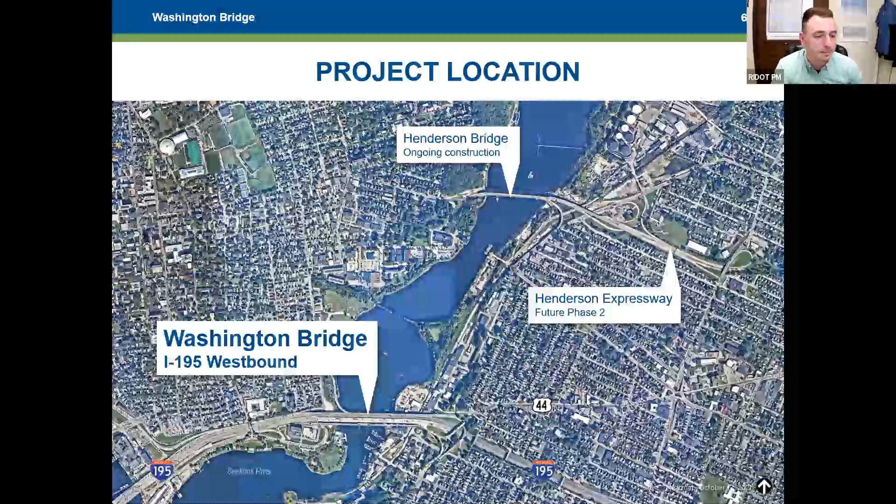The I-195 Washington Bridge North Phase 2 project is located in and around the westbound half of the Interstate 195 corridor in Providence and East Providence. The eastern limit of the project is near the Broadway underpass in East Providence, and the project work extends approximately 1.5 miles to just beyond the South Main Street exit on the east side of Providence.

Along this stretch, there are 3 primary locations where our project work will be focused. First, from east to west, the restriping of 195 West through East Providence to include 4 travel lanes and the construction of a new exit to Waterfront Drive. Second, the rehabilitation of the existing Washington Bridge North superstructure, which carries I-195 westbound traffic over the Seekonk River, as well as Valley Street, Waterfront Drive, Water Street, the East Bay Bike Path, and Gano Street.

The third main location of work for this project involves constructing a new on-ramp from Gano Street to I-195 West, which involves the realignment of the portion of Gano Street located under the bridge. Jeff will be getting into much more detail on each of these locations in just a few minutes.

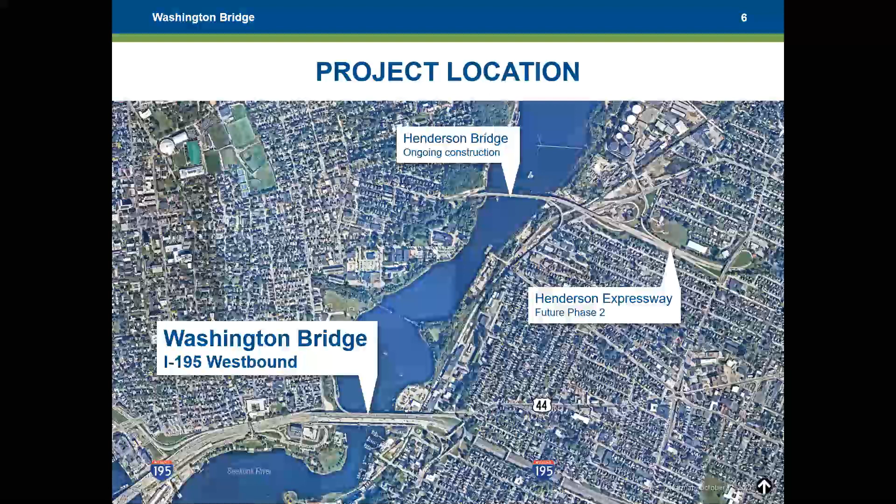Also worth noting is the proximity of the project to the ongoing Henderson Bridge project, located approximately 1 mile to the north. We thought many of you would also have an interest in that project, so I'll be providing an update on the current construction progress and future design plans a little later in this presentation.

The third structure is known as the Washington Bridge North and is the only structure of these three being worked on as part of this project. It was constructed as part of interstate expansions in the 1960s and currently carries around 100,000 vehicles per day. The structure was previously rehabilitated in the 1990s, as well as a partial rehabilitation focusing on the supports beneath the bridge that was completed in 2019.

The planned rehabilitation work under this contract, primarily consisting of concrete deck repairs and deck joint replacements, is being designed to extend the useful service life of this bridge by at least 25 years.

In 2020, RIDOT was successful in obtaining a competitive federal grant with a value of $25 million. These additional funds allowed us to design this project in a way that will not only fix the structural deficiencies of the bridge, but also address the chronic traffic congestion and associated safety issues in a way that otherwise would not have been possible. Through a competitive design build procurement process, the contract was awarded this past September.

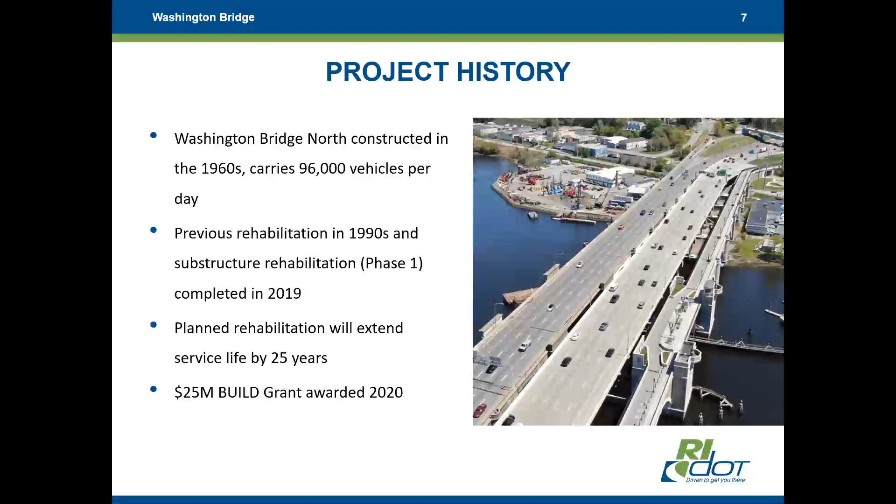We are currently progressing our final design efforts for this project, while initial construction activities, including concrete deck repairs and median barrier replacements, have already begun this winter.

During the life of this project, our project goals can be broken down into short-term goals realized during construction and long-term goals, which begin with the completion of the project and extend for its useful service life over the next several decades. During construction, our primary goals are to maintain existing travel access for all types of users throughout the corridor as much as possible, reducing or eliminating potential public safety risks from construction operations, and minimizing necessary detours and other temporary impacts to highway ramps and local city streets to the maximum extent possible.

Upon completion of the project, or sooner when possible, our major goals include reducing traffic incidents by reducing chronic congestion through the corridor, eliminating significant weaving movements at the GANO Street off-ramp, improving air quality by reducing vehicle emissions via these same congestion improvements, improving the condition of the infrastructure to a state of good repair for years to come, and providing direct interstate access for potential new development along Waterfront Drive in East Providence.

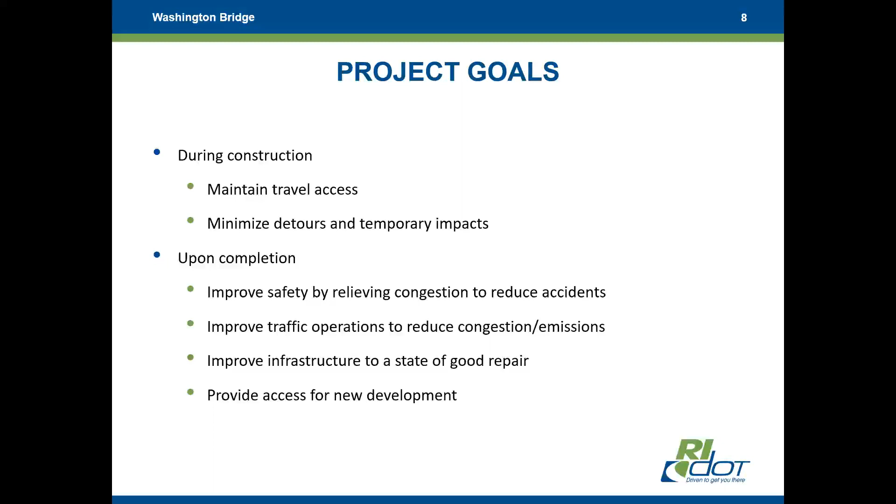And now I'm going to turn it over to Jeff Klein, the design manager for VHB, who's going to get into some of the more specific improvements we'll be making as part of this project. Jeff.

Thanks, Anthony. As Anthony mentioned, there's much more to this project than just bridge rehabilitation. So we're going to step through the project east to west, right to left on your screen, by first walking through the I-195 mainline traffic improvements. Then we're going to discuss some highlights of how those traffic improvements are achieved.

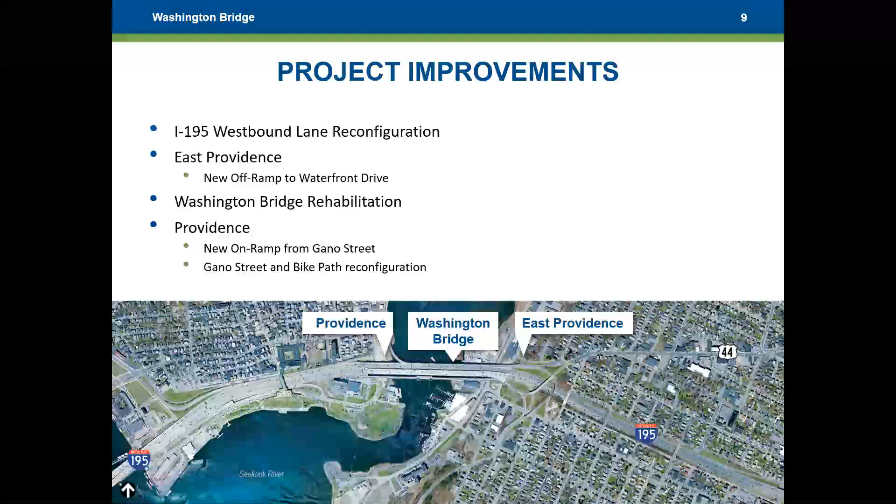To get started, I'm going to turn the presentation for a moment over to Pete Pavo, our traffic lead, to discuss the mainline traffic improvements. Pete.

Thank you, Jeff. Good evening, everyone. My name is Peter Pavo from VHB, and I am going to provide a brief overview of the traffic and safety benefits we expect from this project.

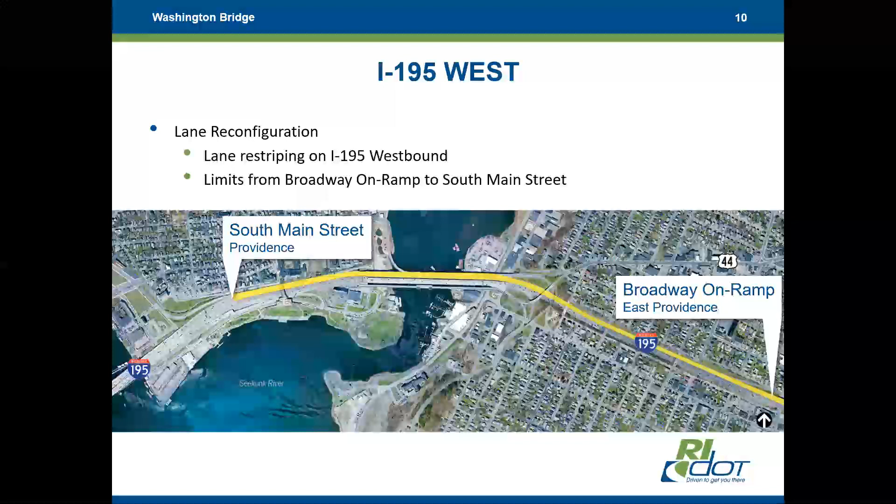It is no surprise that 195 West is congested during both the morning and, to a lesser extent, the afternoon commuter periods. This corridor is one of the most congested in the state. Based on pre-COVID traffic volume data, the travel time coming in from the Massachusetts state line ranges from 25 to 30 minutes.

There are three major bottlenecks along this corridor that contribute to this congestion. First is a low-speed lane drop just past the Broadway exit, which forces vehicles to merge immediately. The next is the weaving that occurs between the Taunton Avenue and Veterans Memorial Parkway on-ramps and the Gano Street off-ramp. And the third area is at the Gano Street off-ramp, where again the lane drop forces vehicles to merge.

Note that in the past year, we have seen travel times fluctuate from less than 10 minutes to over 30 minutes. This can be attributed to the changing travel patterns created from the pandemic.

Because this project was planned prior to the pandemic, the travel time numbers we are using may not match today's conditions, but are expected to return over the next year.

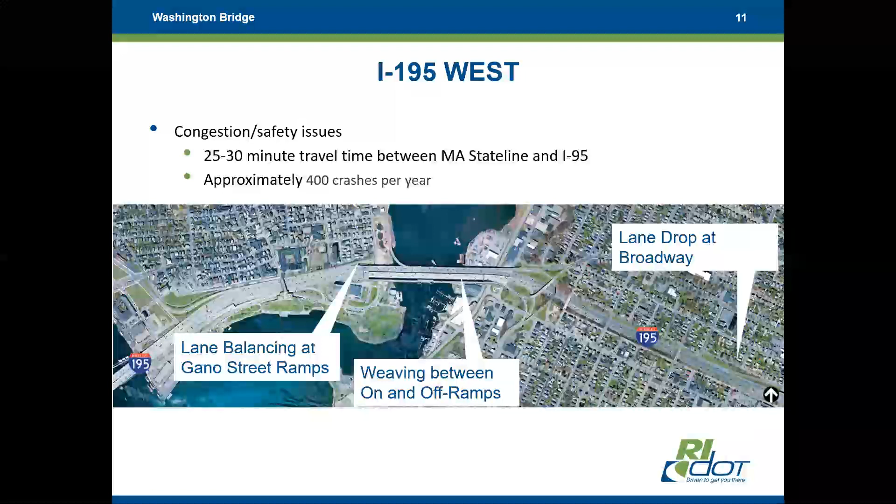To help understand the safety concerns, we reviewed crash reports and trends from the past 5 years within the project area. We found that along the corridor in the area of the project, there are typically 400 crashes annually. Most of these crashes are rear ends due to congestion or side swipes from abrupt lane changes.

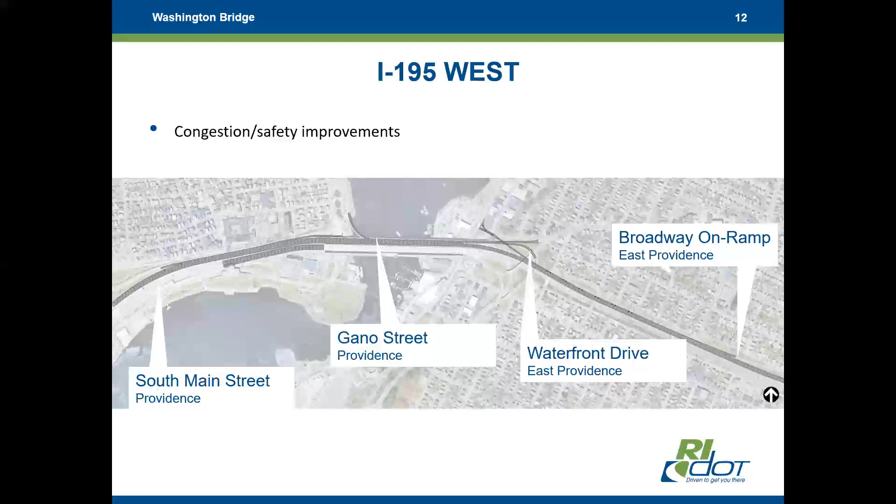To address these three bottlenecks to improve travel times and safety, the project will modify the lane use along the corridor. I will briefly step through each of the four areas of the improvements.

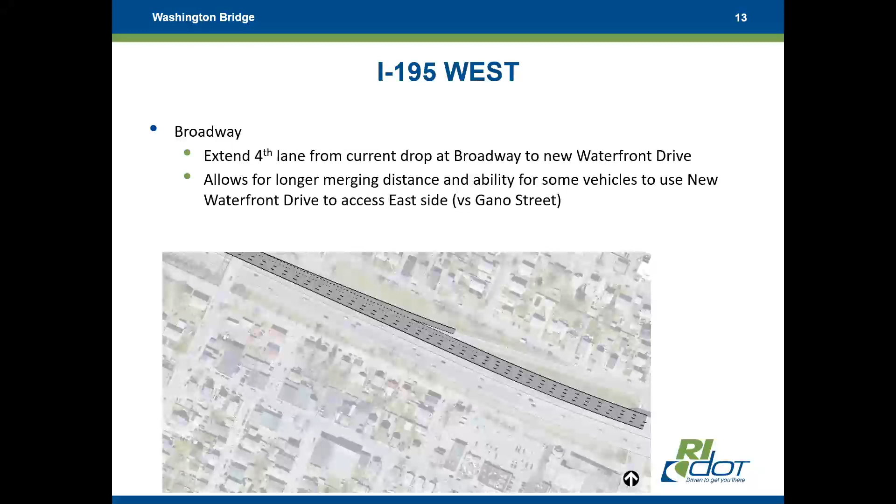Starting at the first existing bottleneck, the project will extend the fourth lane from the current drop point at Broadway to a new Waterfront Drive exit being constructed as part of this project. This allows for longer merging distance and also the ability for some vehicles with a destination to the east side to use the new Waterfront Drive ramp and cross the river using the Henderson Bridge.

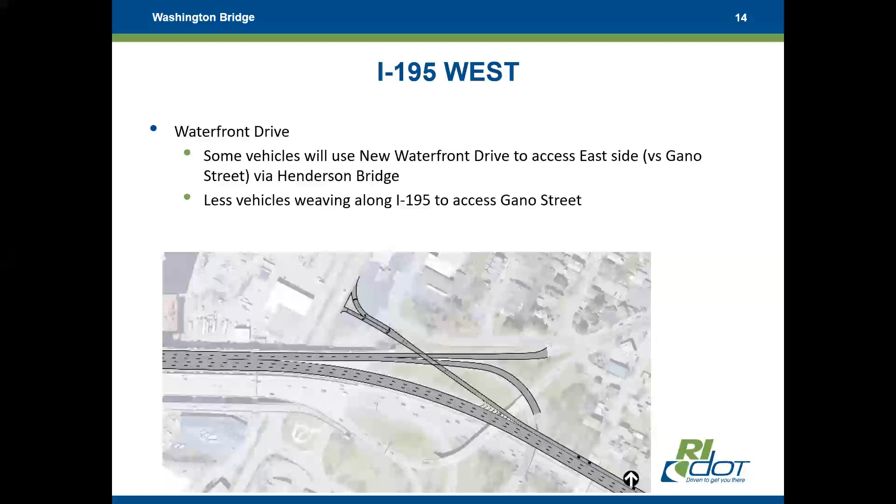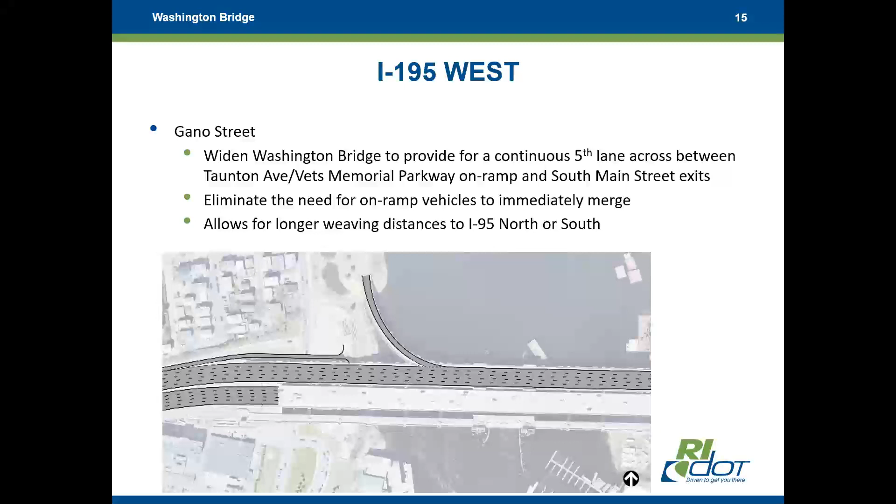While we don't expect a major shift in traffic, any small amount of vehicles diverted this way will help the weaving conditions along 195. To eliminate the need for the Taunton Avenue and Veterans Memorial Parkway on-ramps to change lanes as soon as they enter the Washington Bridge, so as not to get trapped at the Gano Street exit, the project will slightly widen and restripe the Washington Bridge just around the Gano Street exits to provide for a fifth continuous lane.

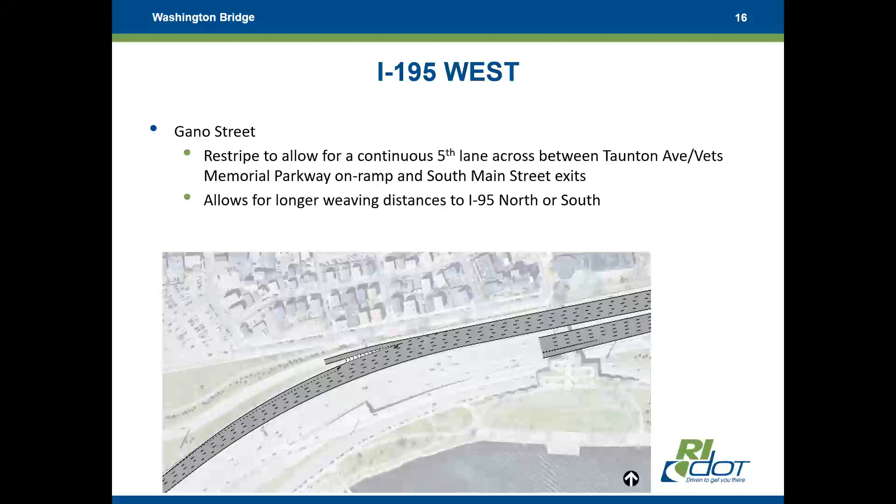Another minor striping improvement that will help traffic flow through the area is at the off-ramp to South Main Street, where we will restripe the lanes to an option lane, which will allow vehicles to continue through towards the I-95 split.

With the improvements I just discussed at the current bottleneck locations, it is expected that the travel time between the Massachusetts state line and I-95 will be reduced over 40% compared to pre-COVID conditions. This equates to the average travel speed during the peak hour increasing from 34 to 52 miles an hour. We also expect approximately a 35% reduction in crashes caused by this congestion.

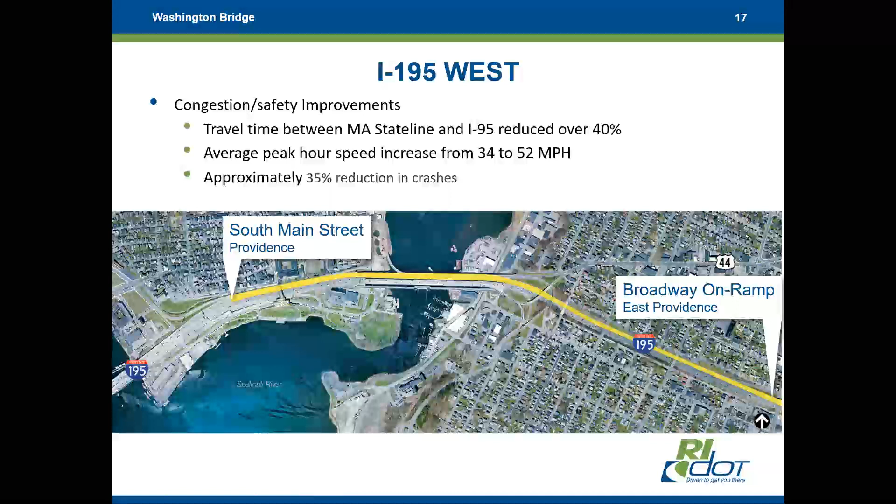Thanks, Pete. Beginning on the East Providence side, as we mentioned earlier, there will be a new exit constructed from I-195 westbound to Waterfront Drive. That new exit is going to travel below the existing on-ramps from Taunton Ave and Veterans Memorial Parkway. That existing on-ramp is going to be carried by a new bridge, and the new ramp will travel below the bridge.

The new bridge shown on the right in blue will require construction of a temporary on-ramp to keep this on-ramp open while bridge construction is ongoing. This phase of construction is going to begin this spring and ultimately is going to allow for the new off-ramp to Waterfront Drive to pass beneath the East Providence on-ramps, as the visualization shows on the bottom left.

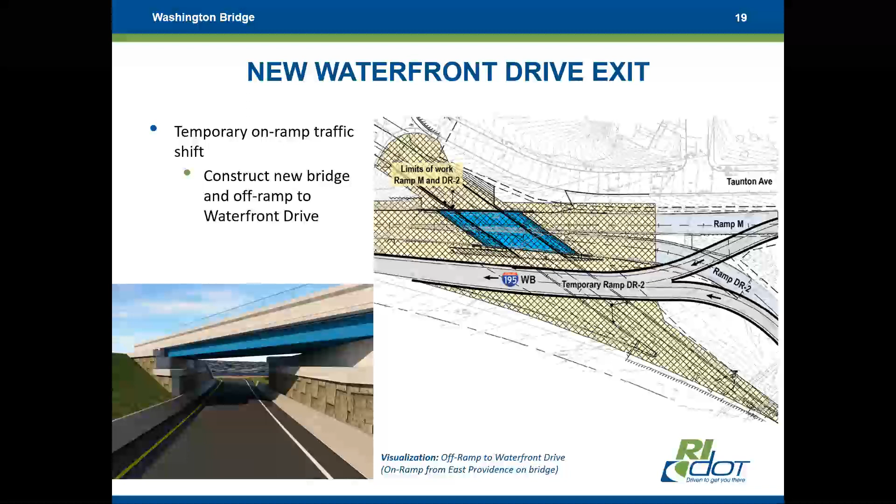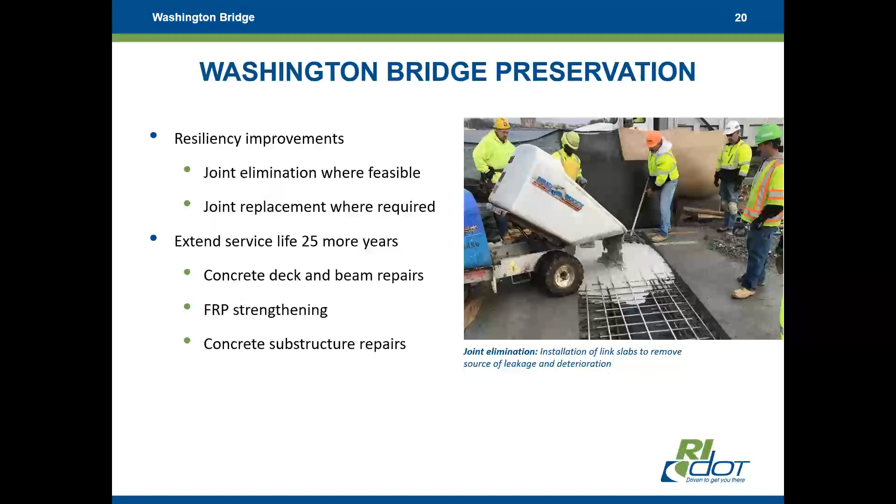One of the major issues driving the need to rehabilitate the Washington Bridge is leakage through the existing bridge joints. To help reduce this risk of deterioration, roughly half of the bridge joints will be eliminated in a method similar to what's shown in this sample photo. Stopping the cause of deterioration at the source, along with repairing and strengthening the deteriorating concrete, will extend the life of the bridge another 25 years.

As Pete mentioned earlier, the first few spans of Washington Bridge will be partially widened a few feet to provide the lane configuration improvements on I-195 westbound. No in-water work is required where we need to widen.

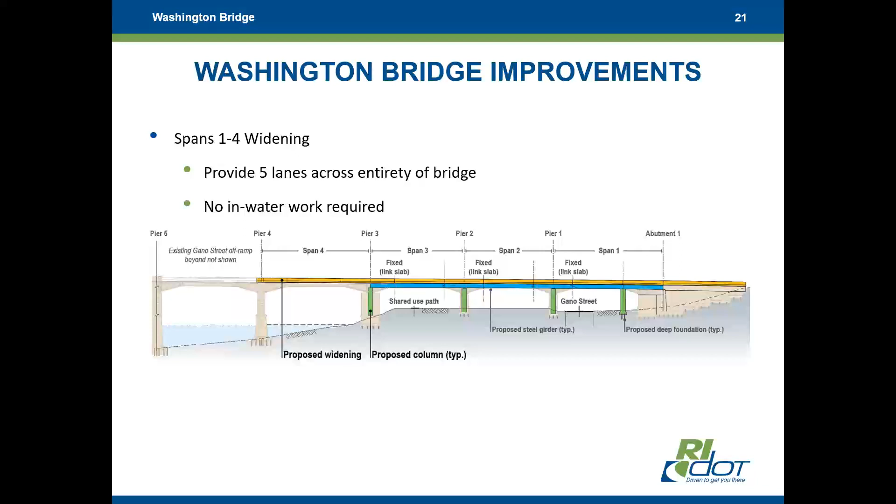GANO Street is shifted to align with India Street beneath I-195 under the third span of the bridge, eliminating today's sharp hairpin turn where GANO Street passes beneath the first span of the bridge.

The new bikeway along the relocated section of GANO Street along the river provides a key missing link in the regional bike path network by connecting India Point Park, the East Bay Bike Path, the George Redman Linear Park Bridge, and the Blackstone River Bikeway.

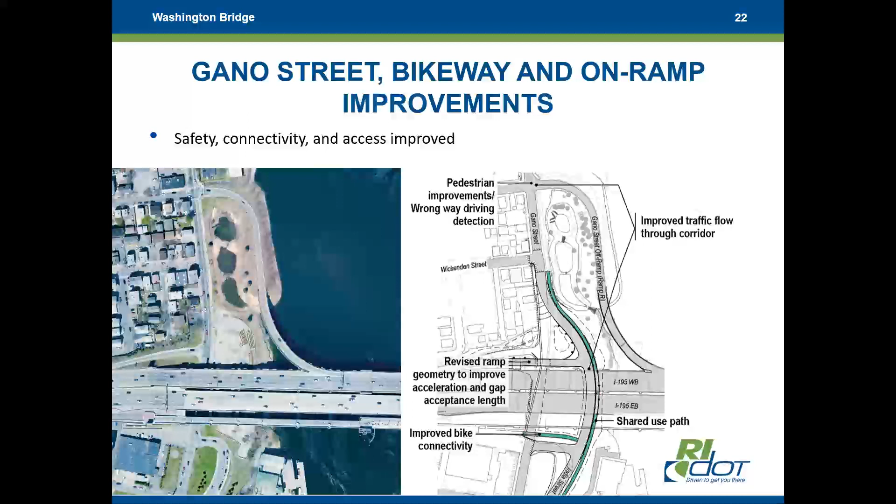The vehicles turning onto the relocated GANO Street on-ramp to I-195 westbound do not need to cross over where path users will be accessing the path. This avoids conflicts at this location. Pedestrian and bike crossing improvements are also going to be provided at the existing intersection of GANO Street and the I-195 westbound off-ramp.

Here's an approximate timeline of how we're advancing from our initial project kickoff in September of last year to substantial completion in fall of 2025. As you're probably aware, stage 1 is already in construction. In the next few slides, we'll walk through what's happening in each phase of construction in the coming years.

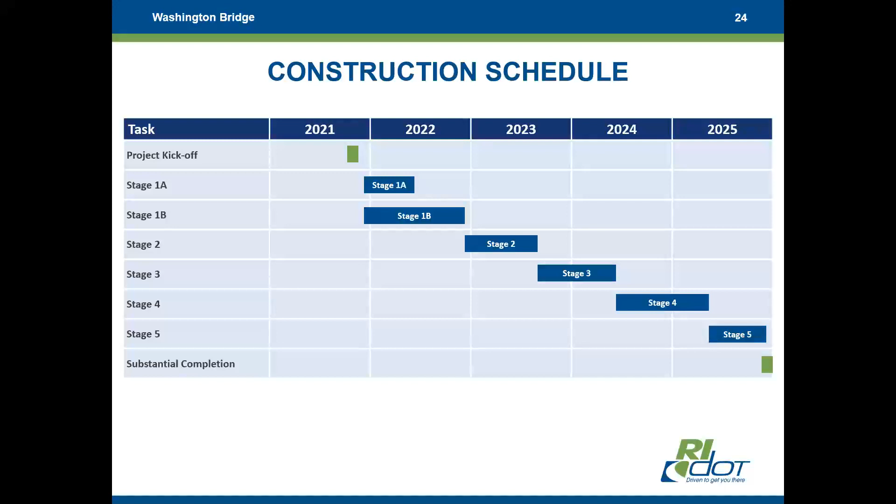Stage 1A included some prep work at the GANO Street exit ramp to open up a work zone to replace the left barrier on the bridge. This phase will be completed this spring, and the GANO Street exit will remain open other than periodic nighttime closures during this phase.

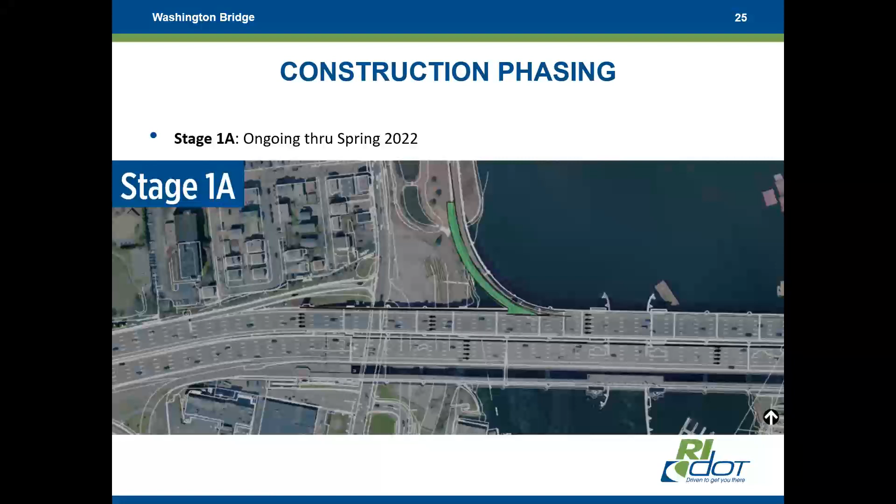We're also currently working in stage 1B. Just before the holidays, traffic was shifted to the north side of the bridge to open a work zone near the left median barrier. Within that work zone, the median approach barrier will be replaced. The bridge deck rehabilitation, superstructure repairs, and joint work will be ongoing. Later this year, the on-ramps from East Providence will be shifted onto the temporary ramp shown earlier to facilitate construction of the new off-ramp bridge.

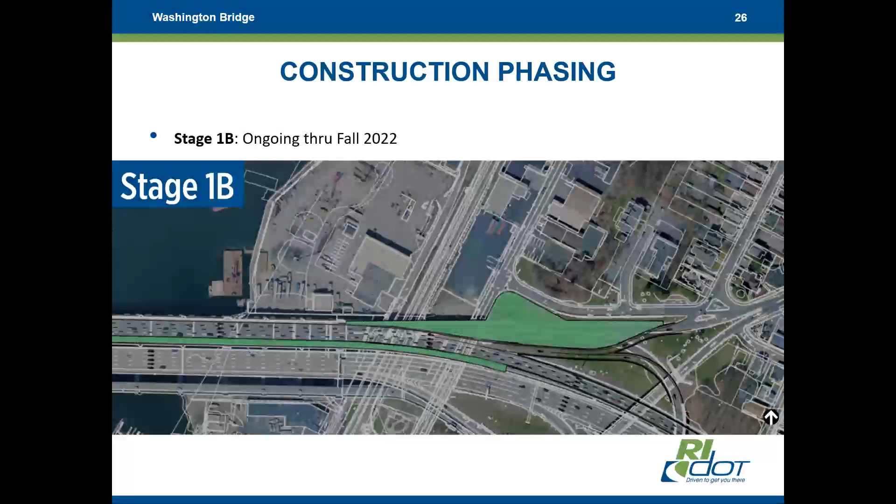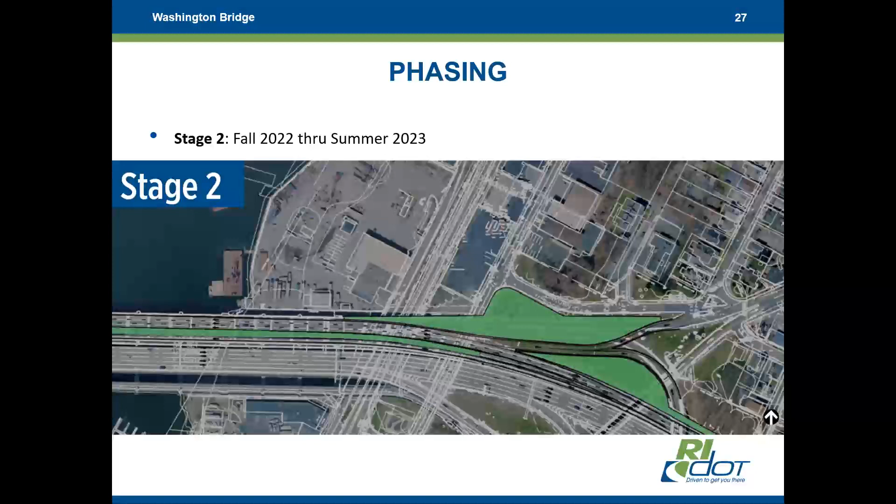In stage 2, traffic is split on I-195. All lanes continue through, but the left lane will be expressed to Route 95 only. The bridge rehabilitation work described in the previous phase is repeated lane by lane across each stage of construction, as you see here and in the next slides. Traffic entering the highway is on the temporary on-ramp alignment from East Providence. It's important to note that the same number of lanes that cross the bridge today are maintained in all phases of construction.

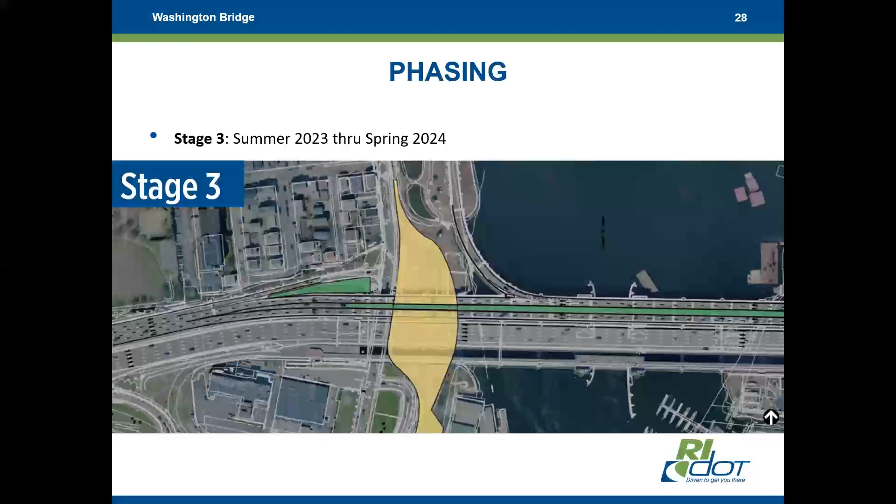In stage 3 next year, another lane shift on Washington Bridge occurs. Also, construction of the relocated GANO Street and Bikeway shown beneath the bridge in yellow begins to take shape. Not shown in this image, the new Waterfront Drive Bridge opens during this phase. The importance of the shared use path can't be understated as it joins India Point Park, the East Bay Bike Path, and George Redman Linear Park Bridge and the Blackstone River Bikeway beneath this span.

The GANO Street exit will need to be closed for a short period of time during stage 4 to allow for barrier safety improvements and bridge deck and joint repairs. Access to the east side during the temporary closure of this off-ramp will be via a temporary detour using South Main Street's exit in Providence to India Street. Traffic also will be able to access via the newly constructed Waterfront Drive off-ramp and the Henderson Bridge during this phase. Stage 4 also includes the widening of Washington Bridge, relocation of the existing GANO Street bike and vehicular traffic onto the new alignment, and construction of the new on-ramp.

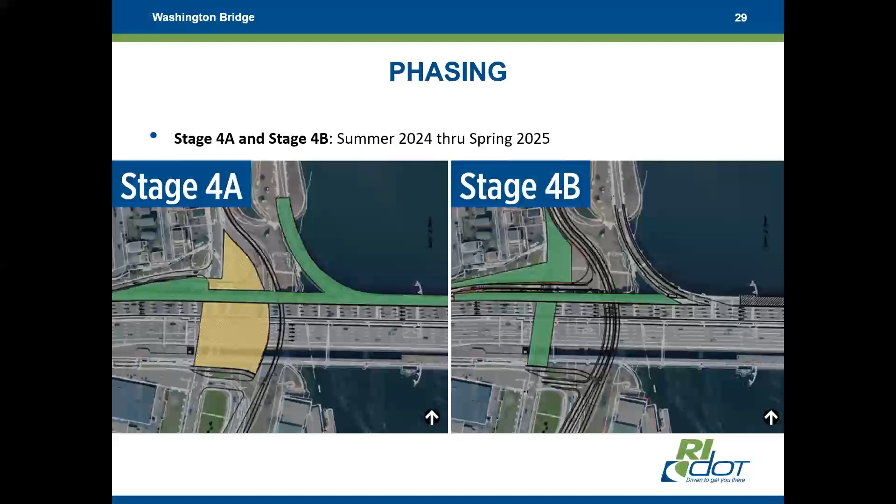The final stage 5 completes the remaining repairs on Washington Bridge. At this time, access to the GANO Street off-ramp is limited only to drivers coming from East Providence.

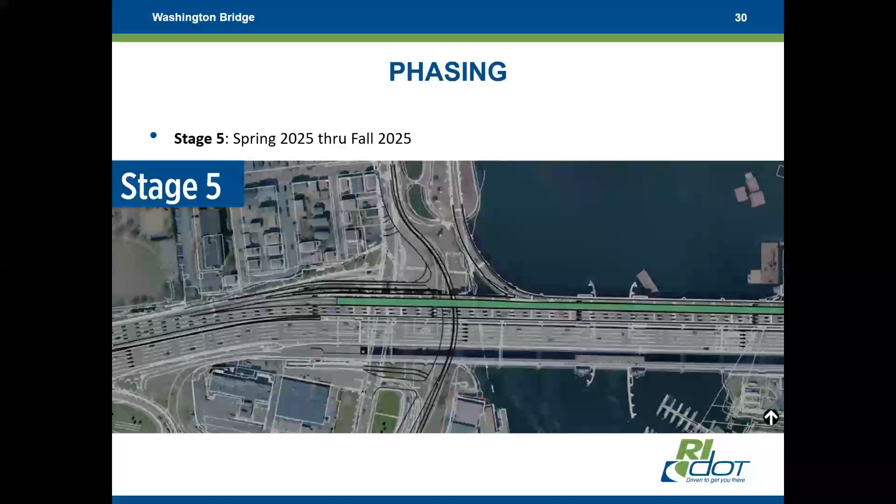At this time, I'll turn the presentation back over to Anthony to provide some updates on the Henderson Bridge.

Great, thank you, Jeff. As we mentioned at the start of the presentation, due to the proximity of these two major projects, we thought this would be an ideal time to provide an update on our ongoing Henderson Bridge project. We provided an overview of the plans for this project when we met virtually in the spring of 2020. The full presentation is still available on the project website for anyone who is interested in reviewing any of the details. We officially issued the notice to proceed for construction to the successful bidder, Barletta Heavy Division, in October 2020.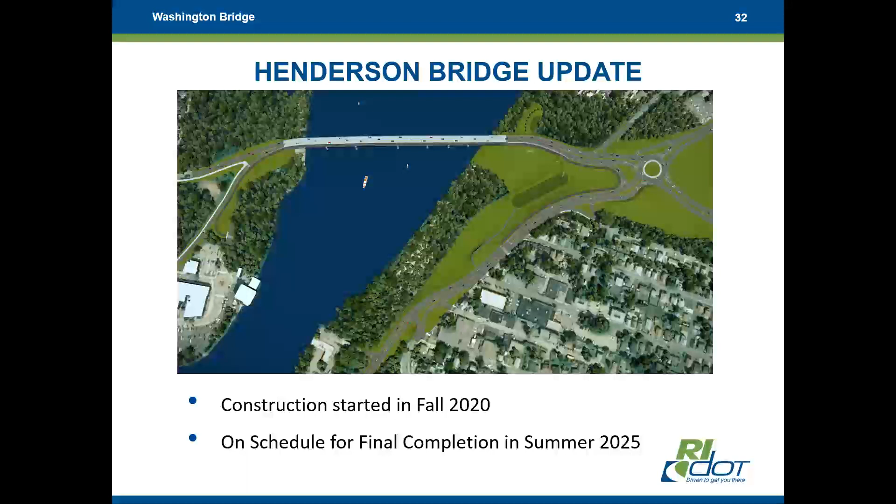And after some preliminary construction activities, traffic was moved off of the northern half of the bridge structure in January of 21. Since that time, demolition of the existing structure and construction of the new abutments and piers have been underway, with the project on track for final completion in the summer of 2025.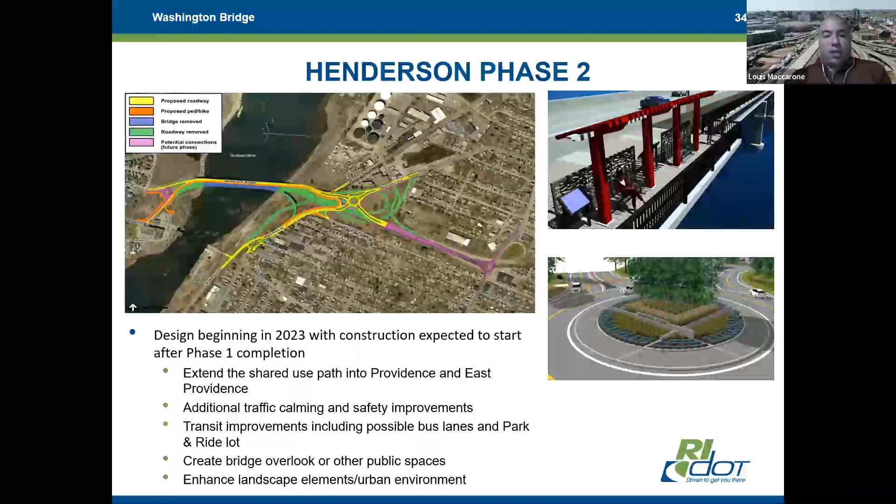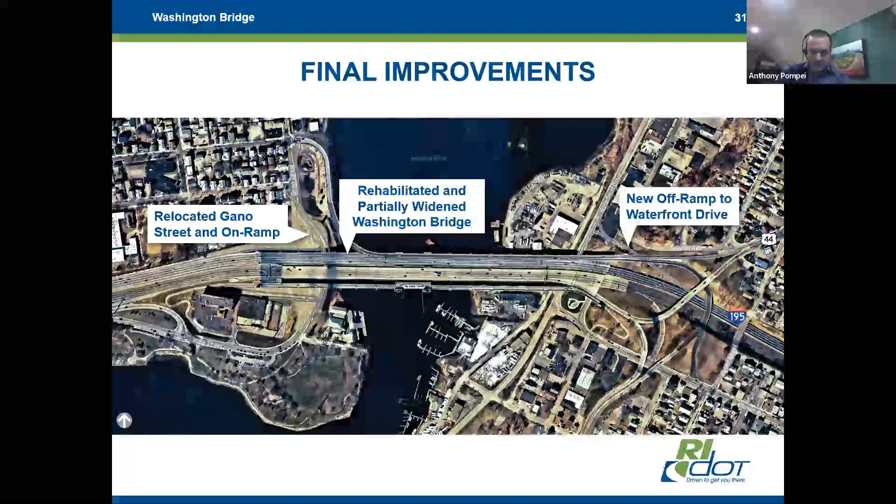Any follow-up questions, Lou? Yeah, there was a follow-up to that previous question: to clarify the Henderson Bridge project, the connection of Broadway and Pawtucket Avenue, to limit significant disturbance at Broadway again. So that's what I had just kind of gone over. Yes, the connection between North Broadway and Pawtucket Avenue is an option that's not in the scope at the moment, but we're at 0% design at this point, so it's certainly something we're looking at to see if it would be feasible.

Okay, next question, and I think this one will be for Pete from our VHB traffic team. How was the estimated speed goal of 52 miles per hour established?

Yeah, I'll take that. So it really wasn't a goal. When we first design and look at concepts to see the best traffic improvements we can make here, we work with many factors. One, obviously, is the bridge, how much can we get across the bridge, so there are cost constraints. We don't want to keep just adding lanes, we want to be cognizant of that. So the design of what we could add to the bridge really limits that, we could add just a little capacity through unclogging the bottlenecks. Once we design that, we put it into our traffic model with the traffic volumes, and it comes up with what we anticipate for the speed that will come out of it. So it wasn't really a goal we set, it's what we feel the traffic will hit given the improvements we have. We could have made it 55 or 60 through here if we kept widening, but then we'd just send people too fast into downtown Providence where they'll get congested again. So I hope that answers the question, but yeah, it wasn't really a goal, it was just the outcome of what the design allowed us to accomplish.

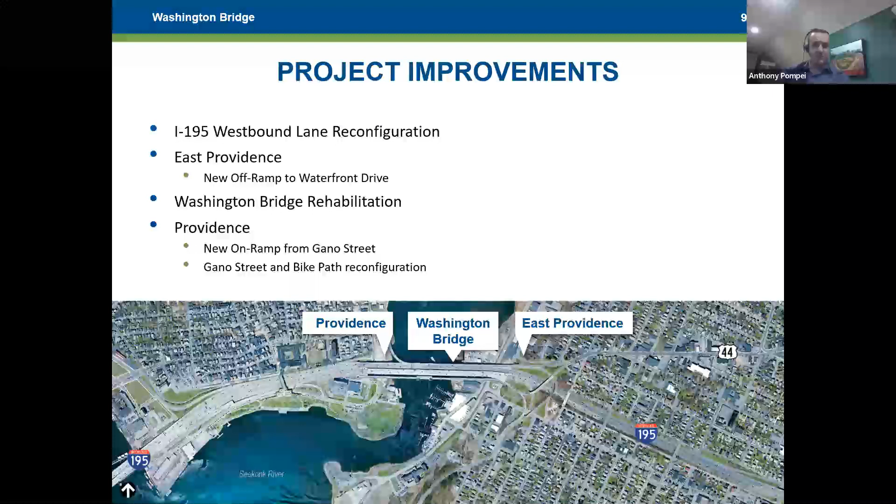Yeah, there's no pedestrian signals there now, so that'll be a big addition, putting in the pedestrian crossing signals. We're also adding a wrong-way driving deterrent system we've used on many other ramps in the state, which can detect a vehicle if it ever tries entering from the wrong direction and send an alert to the office and police. But other than that, there's really no geometric changes to the intersection as part of this project.

By shifting the on-ramp to the south, where it's shown here in this graphic, we're able to keep that intersection at the off-ramp very similar to what it is today.

And just to clarify, there's only an off-ramp at that location. The new on-ramp will be adjacent to the westbound 195 structure. Correct.

I'm sure people have seen other concepts. We did have an original concept that showed the on-ramp located directly adjacent to the existing off-ramp, on the other side of the street from where it is today, running parallel with that off-ramp to get back on. That did make that intersection much larger, and it would have caused some geometric changes there.

So the design-build team we were awarded the project with, VHB, came up with this concept seen here, keeping that ramp really in the same location it is now, just extended a little farther out, closer to the river, which gives it a much safer grade coming up. If people are familiar with that ramp today, it's incredibly steep with very little sight distance getting onto the highway. By moving that ramp farther back towards the river, it allows a more traditional grade.

Thanks, Anthony. Will the ramp to Redman Park just north of Narragansett Brewery be demolished? And if so, will it be replaced?

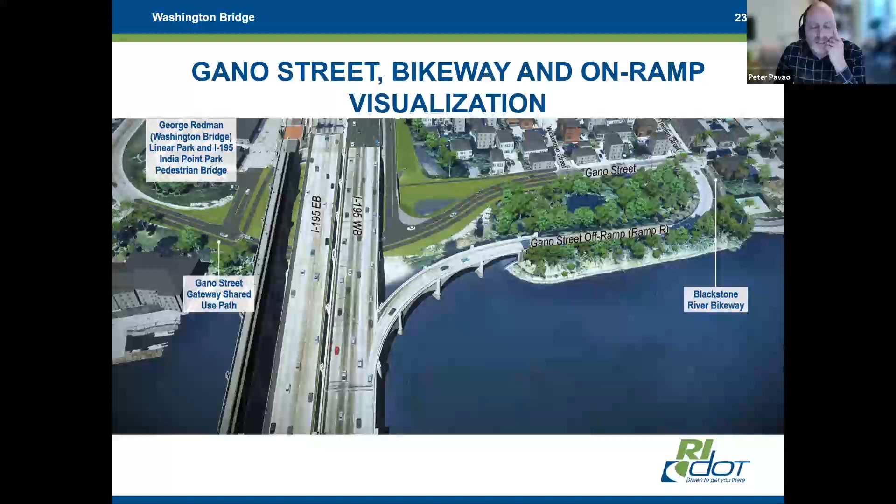I can take the traffic portion. Yes, this project grew traffic out to the year 2055. Typically for bridge projects we do a 30-year lifespan, 30-year projection beyond the opening year. So 2025 was chosen as the opening year, 30 years out is 2055. We did a lot of research on census data and what East Providence and Providence have for potential growth in the area, and we factored that in. When we do our traffic analysis, we always report out at the build year, which is 2055. So I'm good on my question.

And Jeff, I want to jump in on some of the building materials we're using. On the building materials, for the most part we're following RIDOT standard specs for concrete and those types of materials. We always try to explore things that will more efficiently work or more effectively last, but at this point nothing's been identified that I'm aware of.

Is it FRP? Sorry, I shouldn't say that - I was thinking concrete itself. We are using FRP, fiber reinforced polymers, to strengthen the existing beams. So that's definitely an advanced material. We're using link slabs at the bridge joints to provide some continuity and eliminate some leakage there.